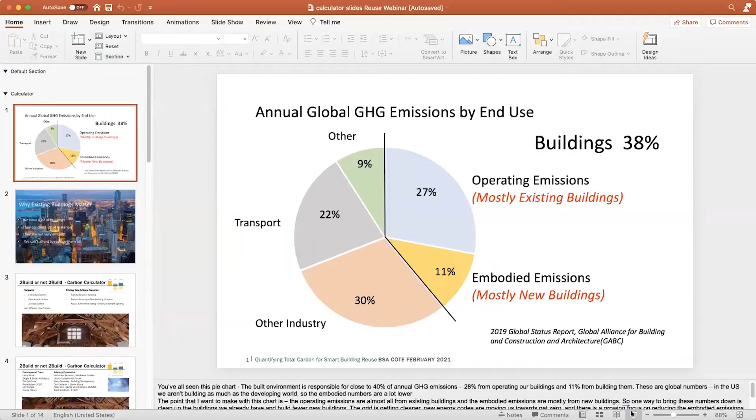Welcome. So just going to jump right in. You've probably all seen this pie chart. It's been around for a while, and it sort of shows this giant swath of buildings' impacts on global emissions, which is about 40%. And the point that I like to make with this chart is not about the operating or embodied, but about where they come from.

The point is that operating emissions are mostly, or actually all, from existing buildings, because you can't really have emissions until the building exists. And the embodied emissions are mostly from new buildings. So one way to bring those two numbers down is to reduce the operating emissions from existing buildings. And the other thing to do is if you reuse more of those existing buildings, you can build fewer new ones, thereby reducing the embodied emissions. So existing buildings seem like a great way to get at both of those numbers.

The grid's getting cleaner. New energy codes are moving us towards net zero. There's a growing focus on reducing the embodied emissions from new construction, but a lot of these encouraging trends and codes are really focused on new construction. They don't address existing buildings, and existing buildings turn out to be the largest source of emissions from buildings.

Let's see, I can get on this one.

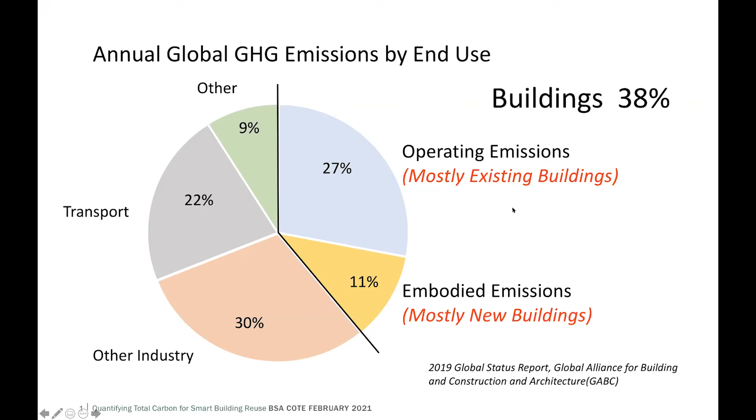Okay, go back. So reusing and upgrading existing buildings accomplishes two things. The upgrade part reduces current operating emissions, and the reuse part makes it possible to build fewer new buildings, thereby reducing future embodied emissions as well. But we haven't had a tool that could compare all of the variables of embodied carbon and operating carbon for different use and reuse scenarios.

Retrofitting an existing building to net zero emissions will always be the lowest carbon option. But what if you can only improve its efficiency by 50%? What if you can replace it by a new net zero emission building? Does it still make sense to retrofit, or should you build a new one? And how does climate and grid efficiency affect those calculations?

So we set out to design a simple tool that could compare all of the carbon emissions, operating, embodied, and avoided emissions of a building retrofit compared to a new replacement building. We wanted to be able to compare these emissions for a variety of existing, new, and reuse scenarios over different timeframes.

The current beta version we have right now compares average emissions of an existing baseline building, and then you select from a menu of retrofit options and select one of 4 new replacement buildings. Each scenario comes with different embodied carbon values, or you can enter your own data. And you can also select your target operating emissions for the new building and the retrofit.

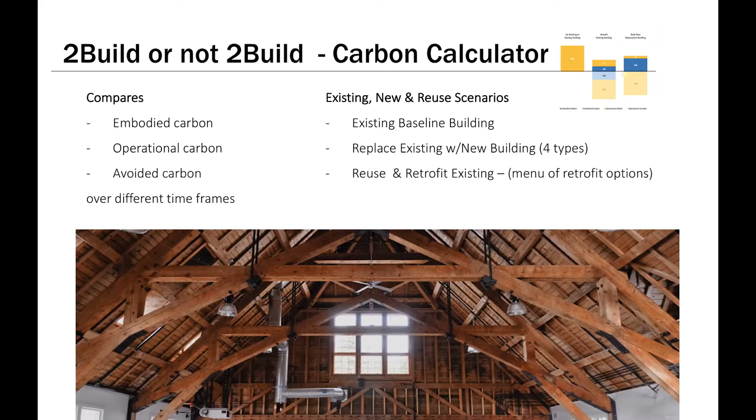We got a grant from One Workplace to work on this. We put together an advisory committee and got to work.

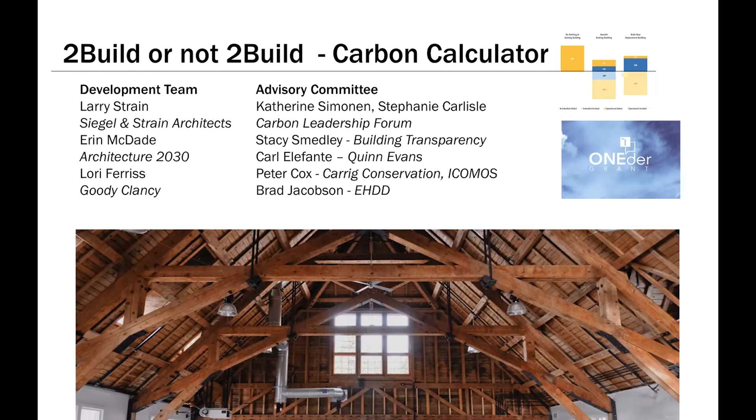All right, so let me start with what we have in there. We start with the existing building, and the existing building is all about operating emissions, because the existing building is our baseline. We're not doing anything to that building. It's just what would happen if you left that building alone.

It just kept operating. So to get those numbers for our calculator, we use the CBECS database and the RECS database, which is the Commercial Building Energy Consumption Survey and the Residential Building Energy Consumption Survey. And those gave us the baseline numbers for these different building types that you're starting with.

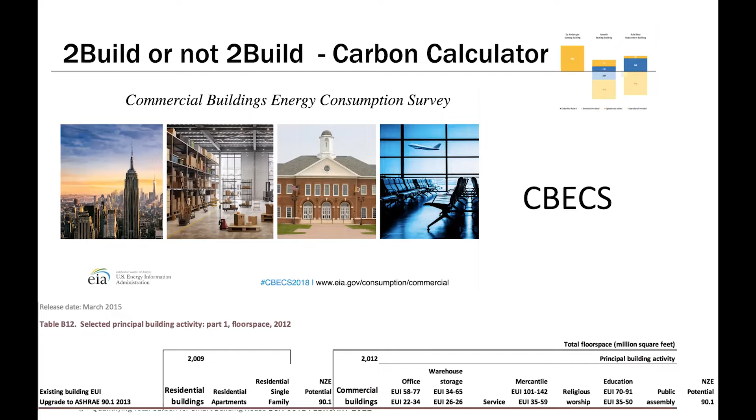Then we picked 4 different new building replacement possibilities. We looked at, and each one has a different profile and a different embodied carbon. These were picked, really defined more by size, materials, and structural systems than by use.

So there's a light wood frame building, a mixed wood, concrete and steel building. This could be wood frame over a concrete parking deck, a mid-rise concrete and steel, and then a high carbon building, which could be a high-rise, super high building, or it could be a blast-proof building in Dubai. It could be anything you want, but it's a building that's high carbon. And each one of those comes with a different embodied carbon footprint.

So you pick the one that most matches the building you're planning on replacing your scenario with. Oops, I'm off it again. Let's see if I can get back on here.

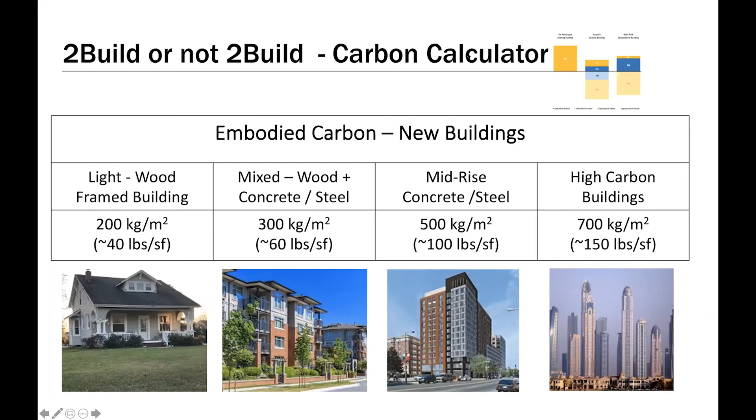All right, then we developed a menu of retrofit and renovation upgrades. So we looked at different upgrades to the MEP systems, the envelope, the interiors, the cladding, and the structural system. And you sort of pick the level of upgrade your project needs. Each one of these tabs has a different embodied carbon number associated with it. So that's the next stage.

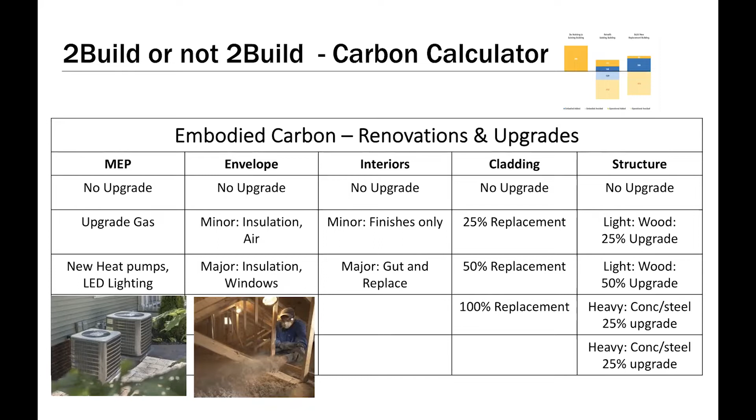And then the final stage is you pick your target operational emissions, your target carbon. So you have your existing building, which is based on the CBECS baseline of 2012. And you can pick the retrofit option: are you going to be 20% better, or 80% better, or zero net carbon? And the same with a new building. You pick those for each one.

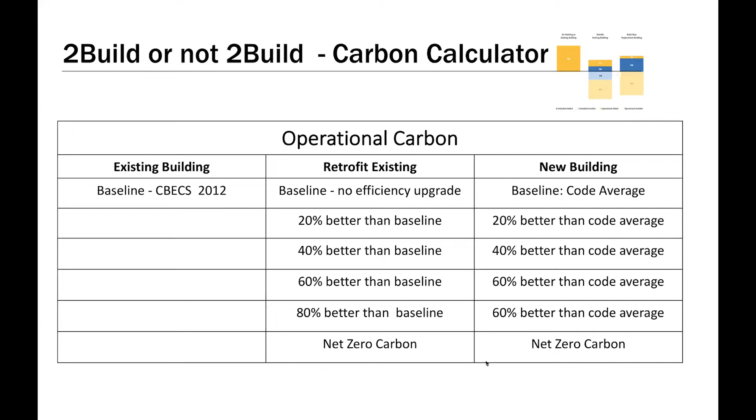So then I'm going to show you how this all works. But this is the idea, that you can get a quick take on whether it makes sense to replace the building or not. So this is what the screen looks like.

There's boxes over on the left that you can enter data, and they all have drop-down menus. As you enter the data, it charts out your emissions for the existing building, do-nothing building, the retrofit, and the replacement building. And it gives you the total emissions.

This is over a 10-year time period. It breaks it down by operational, which is the dark orange, embodied, which is the dark blue, avoided embodied, which is the light blue, and avoided operational, which is the light orange. And then it also charts it over time, so you can see the chart at the end.

You can see that in this particular project, the retrofit building paid off its initial investment of embodied carbon in 4 years, where it took the new building something like 15 years to pay off.

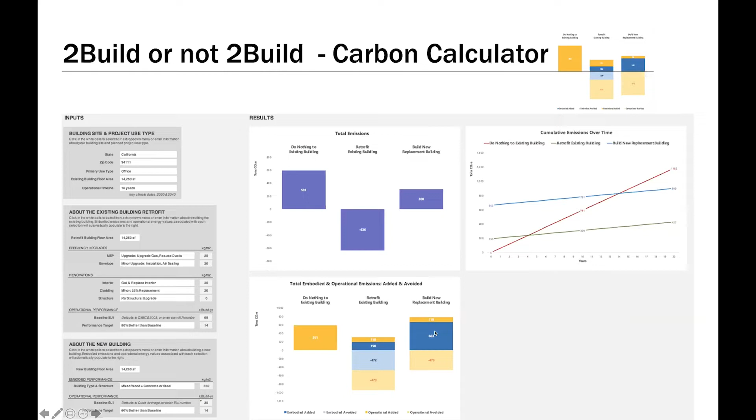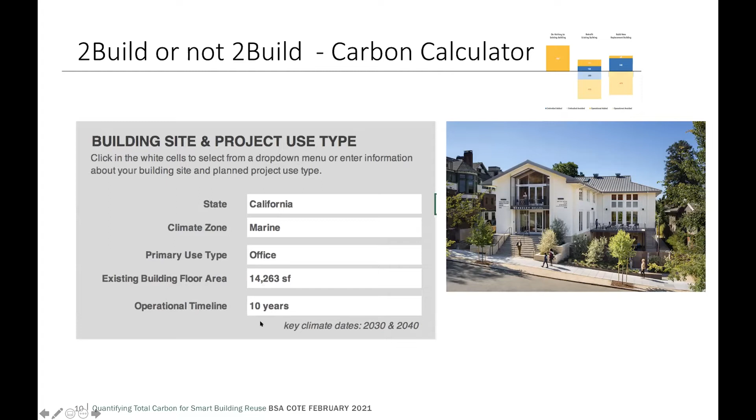So let's go through the different steps. You start by entering project data: your state, your climate zone, or now we've got it tied to zip code. The state gives you your state's grid efficiency, the climate gives you your climate zone, or the zip code will give you your climate zone. The primary use type will give you your CBECS classification - what is the building you're replacing? It might be a warehouse, might be an office building. Then there's the existing floor area and the operational timeline you want to look at. You can change all of these numbers, and it draws data into the calculator.

Then you enter about the retrofit building. You enter the different kinds of upgrades - I can't show it live, but each one of these has a drop-down menu, so there's different choices, and each one of those has an embodied carbon footprint. You also enter your baseline performance, what you're aiming for.

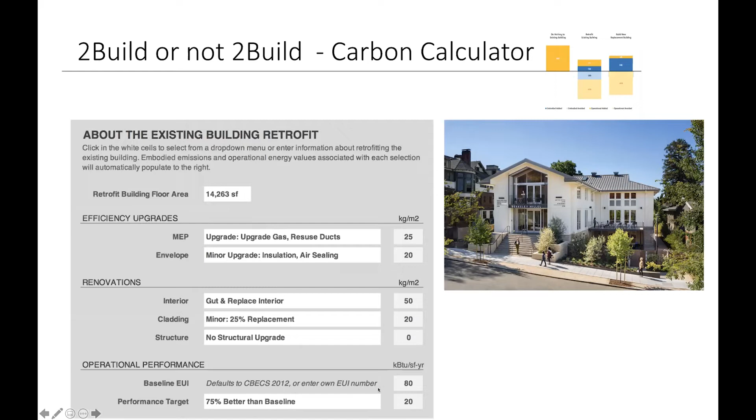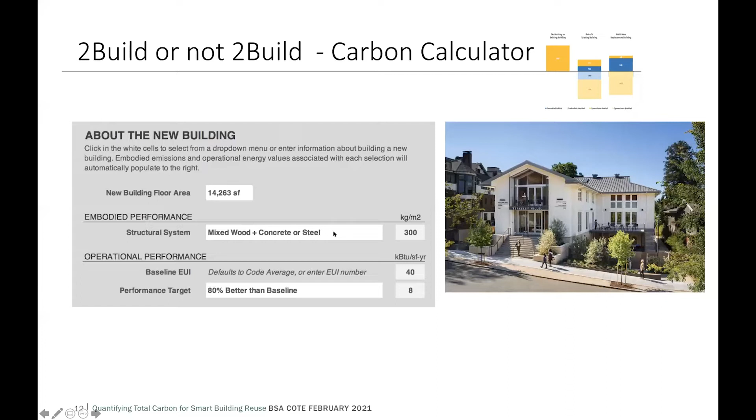You do the same for the new building. In this case, the replacement building was this sort of mid-range mixed concrete and steel building, like a housing project, and your baseline. There's also an embodied emissions modifier - do you have poor soil, or are you using low carbon concrete? These will also modify your results.

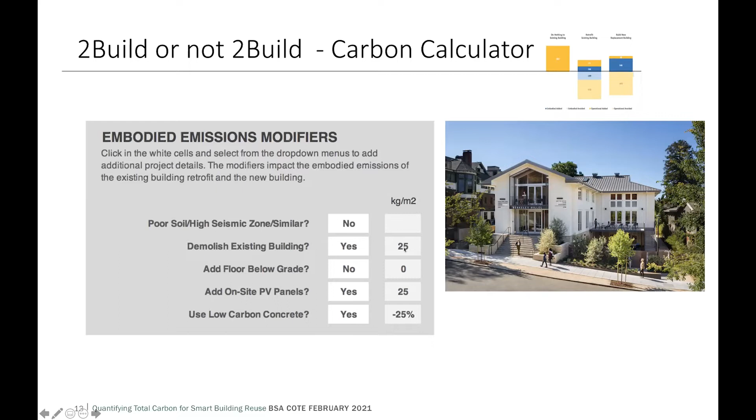And it plots it all out for you. If you have information about your building, it takes about 10 minutes to fill this out, and you get a really quick snapshot on which one is better, when do they start paying off. You can see that the new building is never better than the retrofit - in this case they never cross - but you can see the operating carbon of the existing building just continuing to climb. So that's it in a nutshell.

This is sort of to kick off. Then you're going to get to see a really great case study from Christian, but I wanted to cover next steps. We're still working on this, still adding more drop-down menus. We're trying to keep this a very simple tool, not so much for designers, but more for building owners trying to make a decision about whether to build or not.

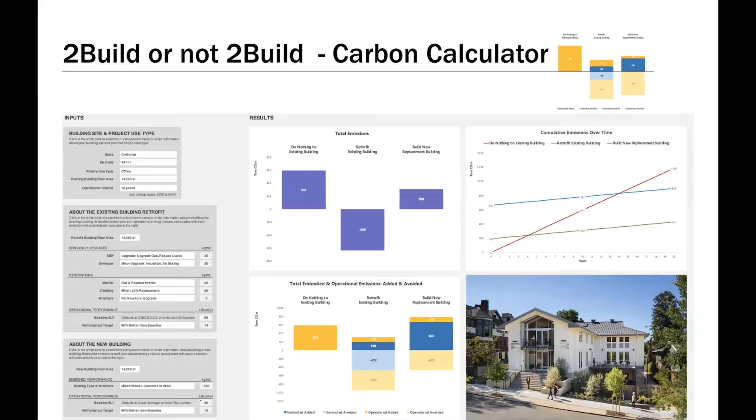So with that, I think that's the end of mine, and I will hand it off to Christian.

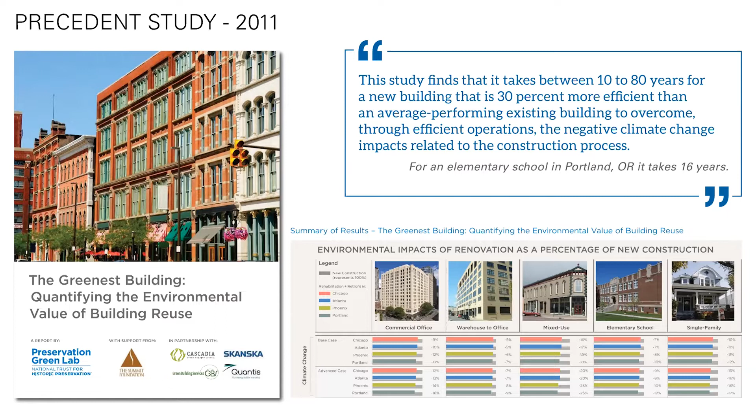We're pondering some of these questions that Larry's getting at in his new tool. One of the precedents we were looking at was a study done by what was called the Preservation Green Lab with National Trust - now called, I think, the Research and Policy Lab. They published this study about 10 years ago addressing the question of how building reuse stacks up against new construction. In their data, for an elementary school in Portland, it would take about 16 years for a new building to catch up to an existing building.

And so we wanted to dive into this a little bit more and see how that played out for this project. The scope of the project was a good candidate for this comparison, because we had both new and retrofitted historic portions of the campus.

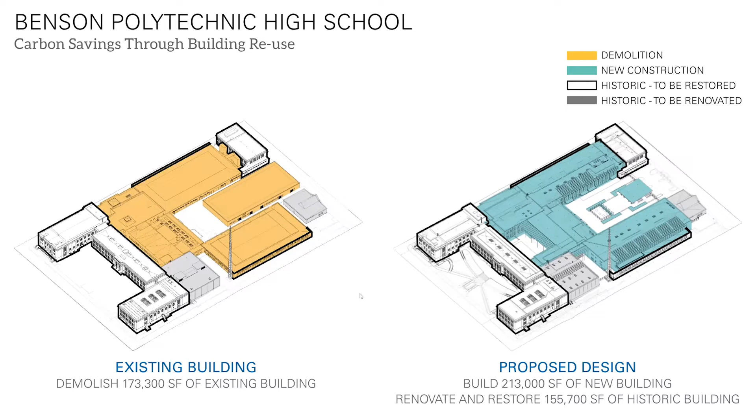The area in yellow on the left-hand side was portions of the campus that we are demolishing as part of the project, and in blue, building that section back new. The highlighted white portions are the landmarked historic buildings, which are being retrofitted and reused. So we thought this was a great case study for looking at both the new construction versus the reused portions of the project.

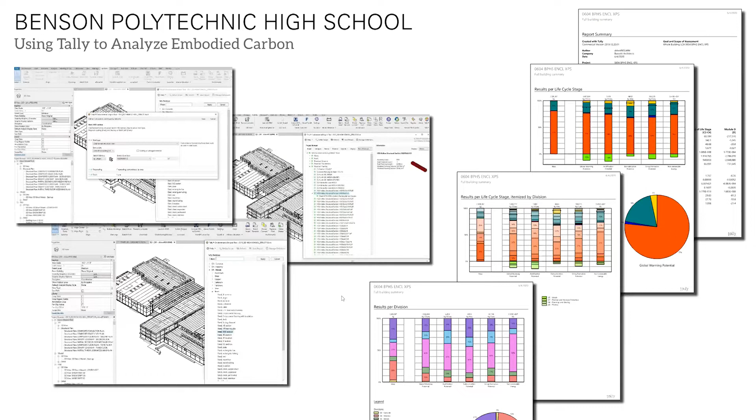The tool we're using for that is Tally. We're doing this project in Revit and using Tally on top of our Revit model to track the embodied carbon data through that. We got some interesting results doing this, and we've done it twice now on the project, both at the end of schematic design and at the end of design development. We'll be doing it again soon. The project is currently in construction documents, so we will be updating this again at the end of that phase.

The interesting thing was that we saw there was quite a bit of disparity between our SD data and our DD data, which you can see on the left-hand side here. We're looking at this as carbon intensity, so kilograms of carbon per square foot.

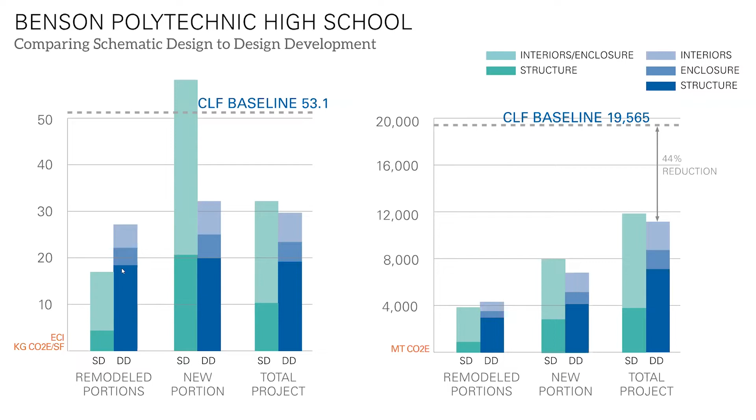The biggest change we saw was for the remodeled portions of the building, where there was a significant jump in the amount of structure associated with that. And then in our new portion of the building, we saw that number come down significantly. So the end result was that for the total project, total carbon intensity remained relatively stable between the two phases, but the new and existing portions had some differences there.

One of the big factors that affected our results was that between schematic design and design development, a lot of additional structure was added to the historic portion of the project. The scope of our seismic improvements, which is the main driver for the structural work at the historic building, greatly increased in terms of lateral reinforcement needed.

Because we're retrofitting the existing building, we're using concrete shotcrete walls to form the lateral bracing in significant portions of that structure. It's primarily light wood frame construction, not heavy timber or a concrete frame like we'd often see in buildings from that era, so it requires quite a bit of seismic reinforcement.

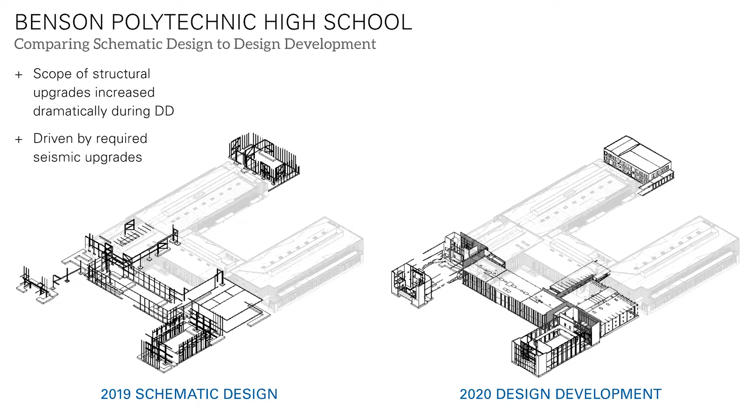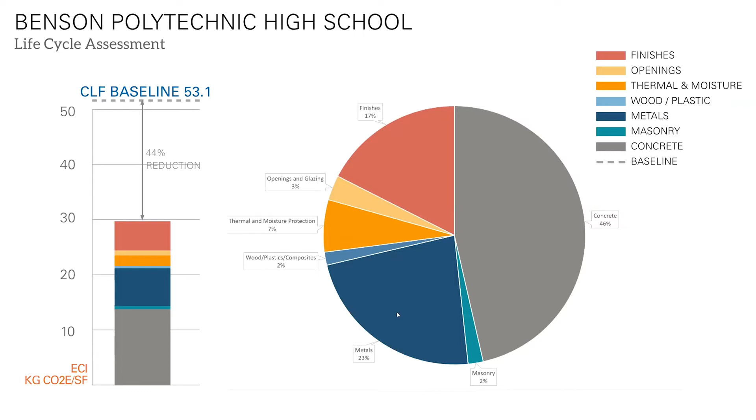So there was a huge jump in our concrete and steel numbers associated with that phase. You can see here that concrete is taking about half of our total embodied carbon for the project. When we track this against the CLF baseline for this project type, which we calculated at being about 53, we are still about a 44% reduction from that baseline. So we're seeing significant savings, but the data's been kind of moving.

We're also comparing this project against other high schools in our portfolio. The two schools on the left-hand side here are typical new construction for us, and those have been coming in at about 30% below baseline typically. The two on the right, Lincoln and Benson, are both retrofit buildings of existing historic schools.

What we thought we would see when we started this was that we'd be at about half the carbon footprint of new construction with our historic work, but really we're at about 75% of those new buildings rather than 50% like we were anticipating.

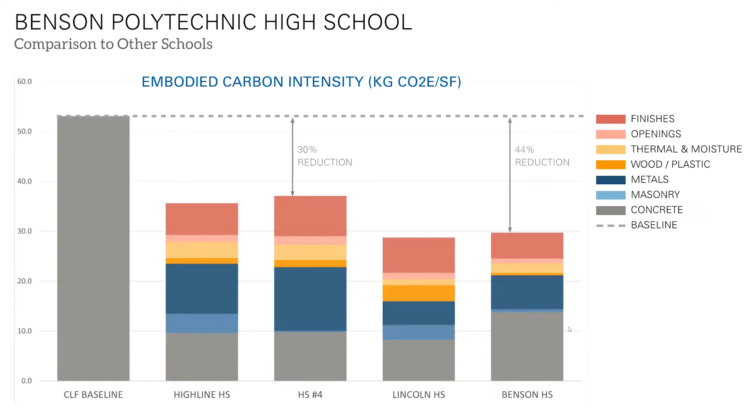It's largely because of the amount of structural work involved — in our region in the Northwest, we have significant seismic upgrades required in these old buildings, and therefore there's a lot of new structure that goes into them when we retrofit them.

The project will be LEED Gold certified, so it's very energy efficient with a lot of innovative energy efficiency measures. For our proposed project and our new replacement project, we assumed the same level of energy efficiency, but for our baseline building, we assumed a code compliant building.

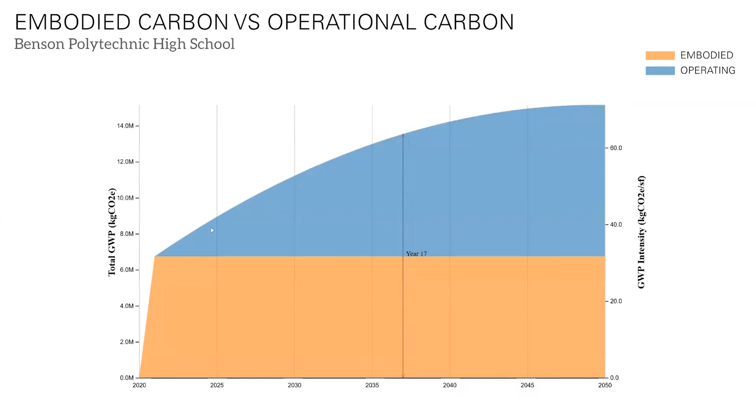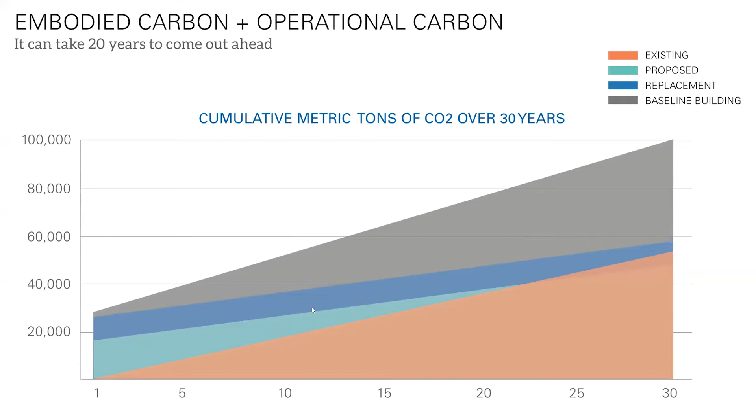That was what we found looking at this project. You can see that the full replacement scenario, the dark blue here, is off the chart - it doesn't ever catch up to the existing building's current energy use over time, even for a very highly efficient project.

As part of this work, this is changing our approach to our projects and our practice. For these new projects we're doing, we're looking not just at evaluating where they are, but also developing low carbon specifications for concrete, steel, and wood, really trying to incorporate this thinking into our projects as we move forward.

And that's it. I'll turn it over to Don.

Okay, sorry about that. I got stuck in my slideshow and could not get back to my mute button.

Thanks so much, Larry, and Christian, for your presentations. That was very helpful for me. I've learned a lot, and learned a lot of what I can share with my community-based clients. Great tools, great analysis, and data that my presentation will not have a lot of, so that's something I won't have to repeat, and I can speed through some of those areas that are more quantifiable.

These are images you all recognize. We have a culture of waste in Western society. It has not always been this way. This is not necessarily new, but it is a little old - new in recent terms, but not very new in historic terms. We are now living at a time that architects, even architects my age, can actually see some of our buildings go into landfill. We are demolishing buildings that may not necessarily need to be demolished. So we have a construction industry waste problem, as well as the normal household waste and industry waste from manufacturing, and the obsolescence culture that we also have within our society.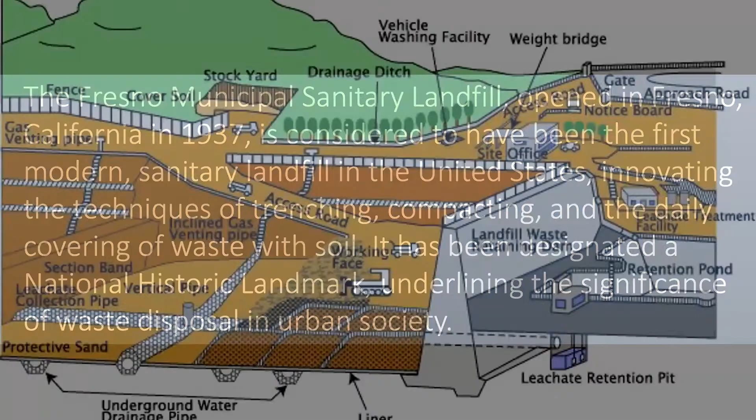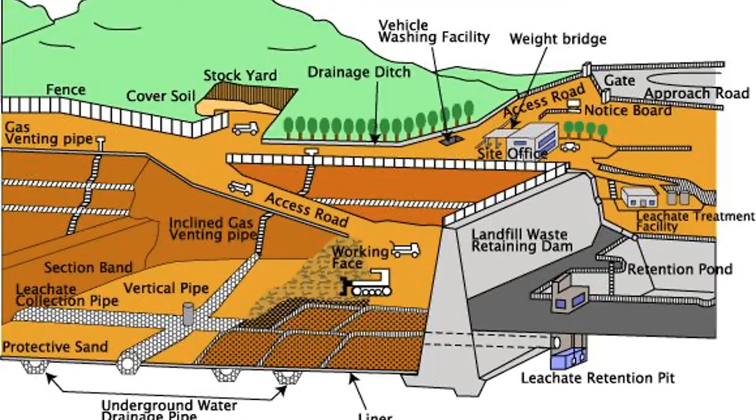The Fresno Municipal Landfill, so-called sanitary landfill, was one of the first in the country. It preceded the idea of an industry of landfill. And in some places, that landfill really became an industry unto itself, and began to become best practice for many communities as to how you shed your waste, what you do with it.

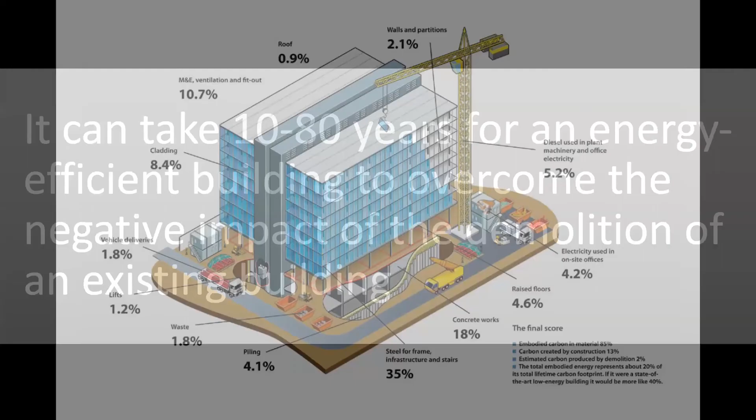As you've heard in some of the previous presentations, we know a little about the embodied carbon that goes into buildings and how that embodied carbon can be saved by saving those buildings. It can take 10 to 80 years for an energy efficient building to overcome the negative impact of demolishing an existing building. Some of these data points you've seen already.

What goes into a new building, what is embodied carbon in that building from that point on, and how does the mining, foresting, manufacturing, and all the transport between any of those activities contribute to carbon emissions. This is something else that is saved—not just the embodied carbon, but the embodied carbon that includes the mining, foresting, manufacturing, transportation, and assembly on site, and the energy used to do that.

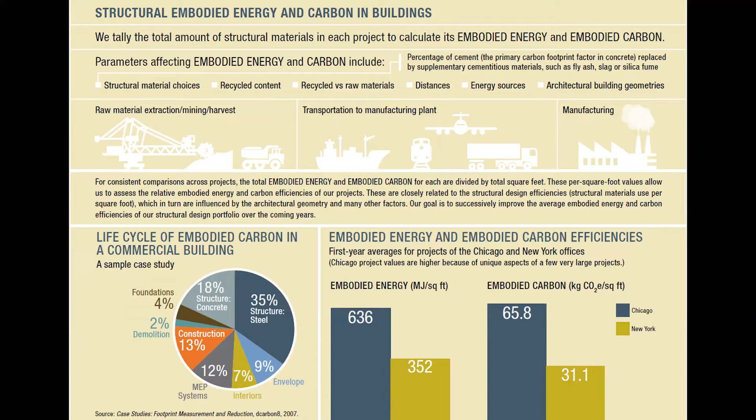I was first exploring and became interested in green building, which was not called green building at the time. As a matter of fact, my master's thesis at UCLA in 1978 was the year that sustainability was coined for green building. The Windward Community College campus in Kaneohe was my thesis site.

I looked at the campus, which was an off-the-grid campus for a mental health hospital in Kaneohe, Hawaii, back in the early 1920s. They applied just about every green means to these buildings that we know today, as well as what they had to use without the technology and knowledge we have today.

Applying these methods of green building and the design standards used for an off-the-grid campus was something that just seemed to be a natural fit for me, and actually saving some of these buildings that were purposefully and intentionally designed to be responsive to the climate, directed and naturally ventilated towards the trade winds.

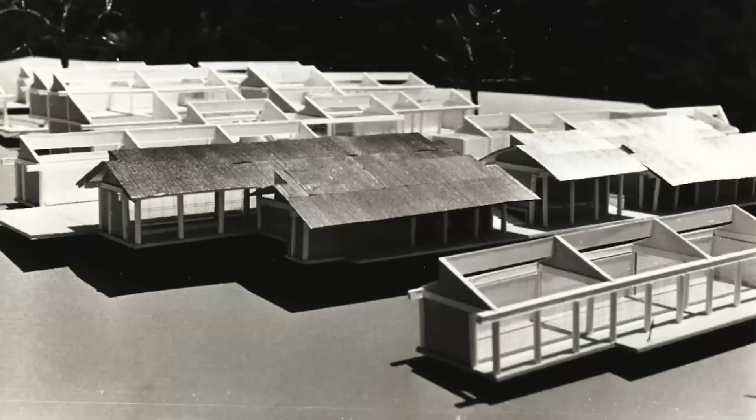I continued to use that format for new infill buildings and retrofitting and repurposing existing buildings. It resulted in a re-envisioning of a green campus in a community that was a majority-minority community, a community of color in Hawaii, that was then able to witness a very necessary means and approach to construction in a place where just about every building material had to be imported to the islands. So transportation of that material was a much greater impact on carbon emissions.

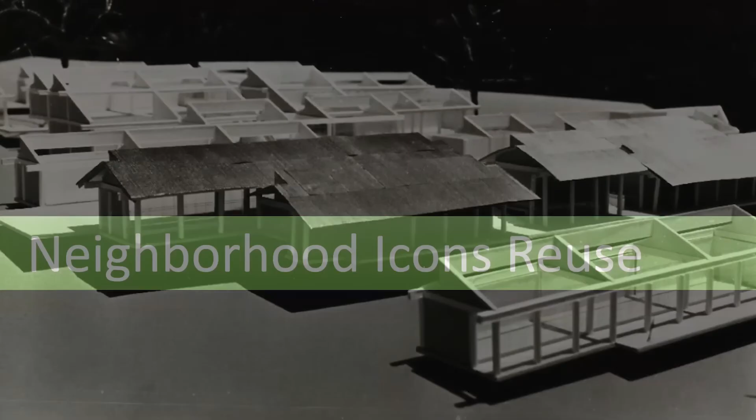I also looked at neighborhood icons. So advancing 30 to 40 years into my career, I continued to be exploratory on the idea of reuse of materials. This comes from my background as a less than privileged individual and from a family that recognized that reuse of materials is critical—something that is a necessity when you have a scarcity of materials and resources.

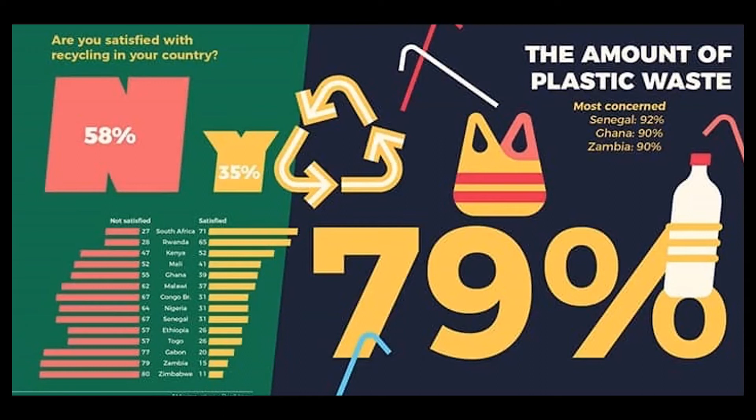In a traditional village, you don't see plastic bags. Everything is reused. If there's plastic bags there, they're probably being used for storage or some other purpose on site, not thrown away on the ground.

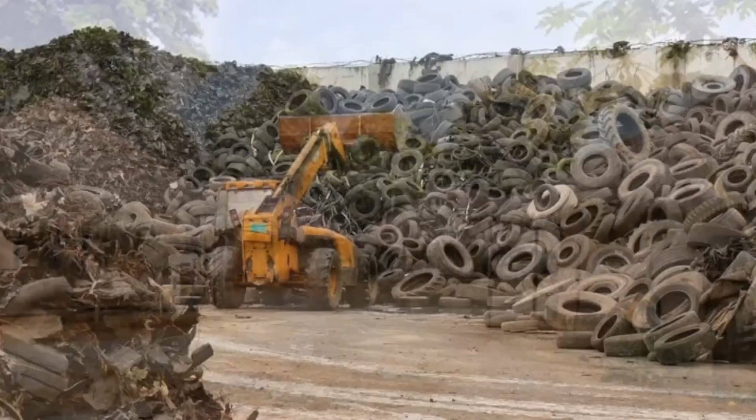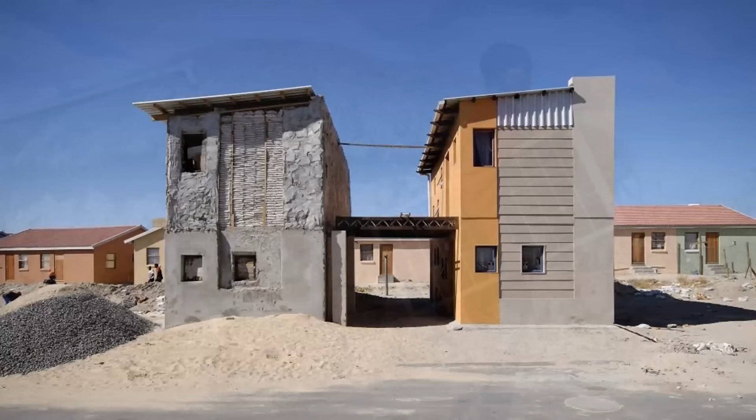So you've seen this slide earlier, but you didn't see this one. Innovation and reuse is now becoming more of a cultural reinforcement. It's a reintroduction of reuse of materials, along with the necessity to apply green building and technology to the necessities of life, electric power in some of these rural villages. How can you be innovative in looking at the reuse of materials and not being reliant upon the import of manufactured materials from the West?

Using local materials. This is a sandbag house in South Africa. This is a repurposing of abandoned grain silos in Cape Town, South Africa, into a museum complex.

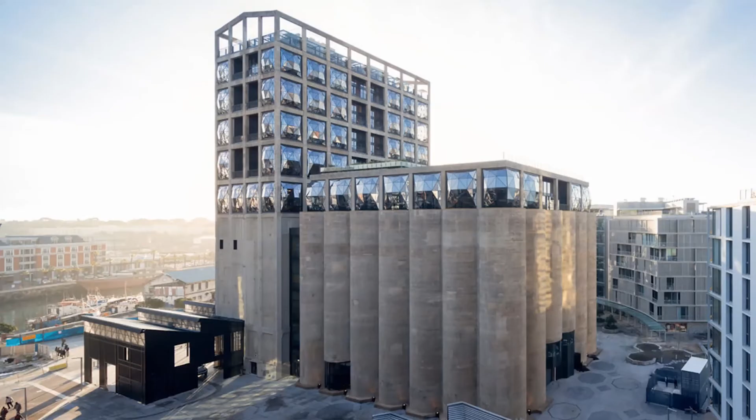So how do we encourage approaches for innovation and expand our constituent base to communities of color, to emerging nations, and begin to break the cycle of a culture of waste, and include the reuse and repurposing of buildings as part of our overall strategies? Thank you.